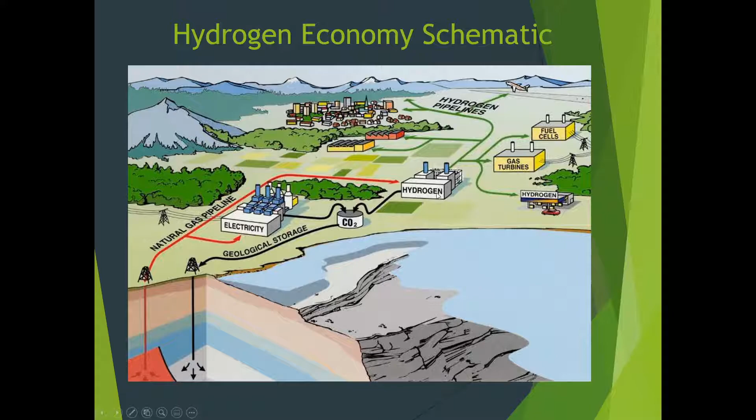Okay. Yes, we do have some natural gas pipelines and stuff like that, and they could be converted over, but we still need to have the central plant and then hook the central plant up to the grid there. All right, Hong Kong is actually doing this a lot. I don't know if they're going to continue doing this because they're having some troubles in that community. But I know that China really wants to do some renewable energy stuff, so I don't think they're going to take this away. But the infrastructure is defined, developed, and delivered.

So they have a lot of hydrogen backup power electrical generator systems for a lot of the skyscrapers in there. They're using it for home fueling. They have this little box right here. You can actually plug in your water tap and make that hydrogen, and go in there and fill up your home. They have hydrogen residential storage units for some people in there. Hydrogen tanks on some of their buses. Community fueling infrastructures being built around Hong Kong.

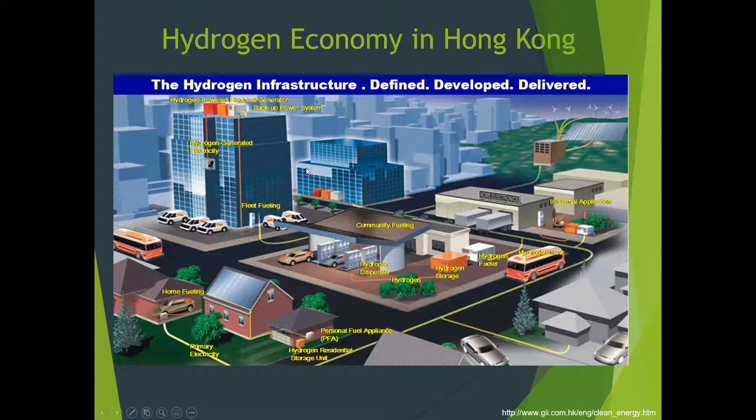So if you want to see a nice case study and see how a city or even a nation, I guess Hong Kong is almost a nation, but still a city, is transferring over to a hydrogen economy, Hong Kong is definitely one of the first ones on the cutting edge of this. Also, like I said, China. I just put this picture up here of these new buses that run on hydrogen.

And also, we need all these hydrogen fueling stations to be put around. And this is what one would typically look like. It's just a big tank of hydrogen. And you just pull up and do the same thing with your gas tanks. Instead of having that liquid fuel go in there, you'll put the hydrogen in there.

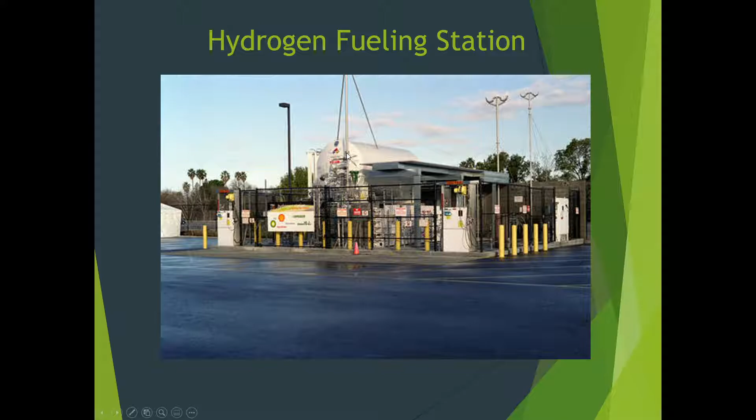And this is actually a little bit safer than liquid gasoline, believe it or not, because that liquid gasoline is a toxin and it gets on the ground and can seep into aquifers and all this other stuff when it's stored underneath. It can leak and cause some environmental damage. But hydrogen is a gas. So if it does leak, it's going to go straight up in the air and find some oxygen molecules and make some water. It's not really going to harm you and explode. A lot of people get scared of explosion with hydrogen, but it's not really that possible, because it's so diffused.

So the hydrogen production cycle. There's a couple of different ways we can make hydrogen. So we can use biological, we can use solar, wind, nuclear, fossil fuels.

All right. To get that H2 or that hydrogen, sometimes we take it out of the fossil fuels, and sometimes we do what's called electrolysis, which we'll talk about in a little bit, and we get that hydrogen and make it into that gas or hydride. All right, so we're just the H2. We can store that, and then later on convert it to what we need.

All right, we can use it for the fuel cells in our cars. Okay, put that gas directly in our cars to run our fuel cells. Consumer electronics, we can make different plastics and things like that out of it, and also we can create electricity. So we can keep the lights going on, or heat, and burn it for heat generation. Okay.

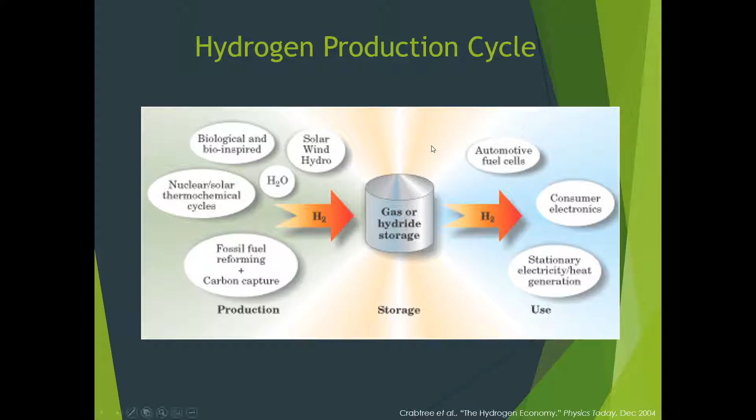So hydrogen production into the hydrogen economy. All right, so the hydrogen economy is going to change a lot of these different things. All of our packaging, our distribution, our storage, and our transfer really needs to be switched over from how we do this with fossil fuels, with coal and natural gas and oil, right?

Because the distribution, although we'll have some pipelines and stuff like that, we're going to have to package it. We're going to have to compress it or liquefy it or put it in what's called a hydride. That's more of a solid state form, all right? And this is really hard to do. But the two best are compression and liquefaction. That way we can take it down the pipelines, the roads, the rails, or the ships.

All right, and these pipelines, you just can't convert from natural gas to hydrogen because the pipelines have to have different specifications to keep the stuff in there. All right, and then the storage is also going to have to be pressurized or cryogenic, freeze it down into a liquid form. All right, and we have to change it from that gas, collect it, compress it, and send it on out.

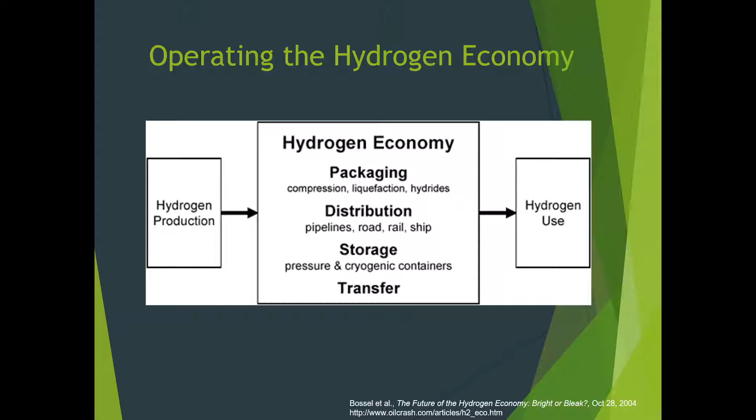So you can see that changing over to the hydrogen economy, there's a lot of engineering problems that we have to overcome, but we can do it. I know we can build that kind of new grid, I guess I should say. All right, and then after it's all done, we can switch it back into hydrogen, and we can burn it, or we can run it through a fuel cell to give us some electricity, whichever one we want to do.

So instead of going to Wall Street, where there's futures markets for oil and natural gas, no futures markets for coal, I envision someday that we'll have to have a futures market for H2, for hydrogen, so that they can sell those futures so these manufacturers and retailers can plan their pricing for this stuff.

And that's one of the things the people in this podcast talked about, how they want the cars all driven on hydrogen, the electricity fuel cell cars. But we really don't have the infrastructure set up. And it's going to take a long, long time. And to get that done by 2035 will be almost impossible. All right, it's kind of pie in the sky. And some of this technology still is not actually done and proven to be viable.

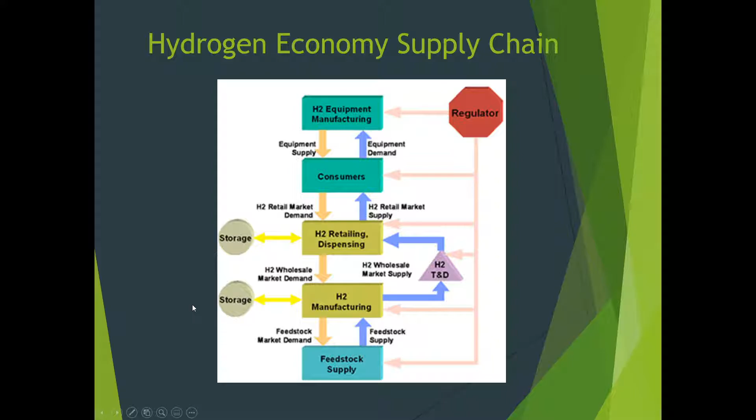Okay, but there's a lot of advantages to a hydrogen economy. Okay, first, the waste product of burning H2 is water. So we set that H2, that hydrogen, out into the atmosphere, it collects with an oxygen molecule, and becomes water. And that's it. That's our waste stream from H2. All right. So that eliminates fossil fuel pollution. Okay. If we're using the H2 to convert that into energy, we have no fossil fuel pollution. We also have no greenhouse gases.

It gets rid of our economic dependence on other foreign nations for our fuels. Like I said, we only have about 2% of the world's oil, so we're always going to need oil from either Canada, and Canada is a foreign nation. So we don't really have that much. We might have enough coal to last forever, but definitely not enough natural gas, right?

And distributed production, all right? So we can also produce this all over. Remember, I've said a couple times during this class that the ecological economists like to say the macro is only as good as the micro. We could actually have a lot of different micro production facilities because it's just taking water and running some electricity through that, and we get the H2 on one side and the oxygen on the other side.

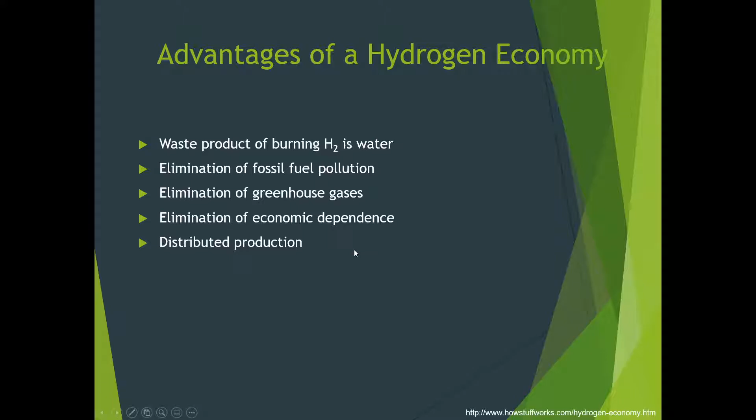It depends on how we make that electricity, of course, but we can have all these little production facilities and have them all tied in together. And if one goes down, the other one can maybe step up, and we won't miss it because of all those different nodes backing each system up. Okay, but there are some issues.

So hydrogen really is not widely available on planet Earth. It's always locked up in something, in our water or in our hydrates in the ocean. Usually chemically combined in water and fossil fuels, they can be separated. Like I said, a majority of our hydrogen comes from fossil fuels, from separating that hydrogen from the fossil fuels, and we never really used it. What we would do is get rid of it because we get a bigger bang for our buck when we burn it.

But we can definitely separate it. This becomes costly though, and we need to be careful. Fossil fuel sources contribute to the pollution. So if we're trying to electrolyze this water to get the hydrogen out using a fossil fuel source, there is no carbon plus. We're just not fighting climate change. We might as well have just burned the fossil fuels, got electricity straight from it and used it in our houses. So there really is no advantage to getting hydrogen from water using fossil fuels.

Electrolysis costs a large amount of energy. To get this electrolysis going, which we'll talk about in a little bit, to separate that hydrogen from that oxygen molecule costs a lot of money. It's a lot of energy to be put into that. And we've got to make sure that the energy that we put into that is actually clean, I should say.

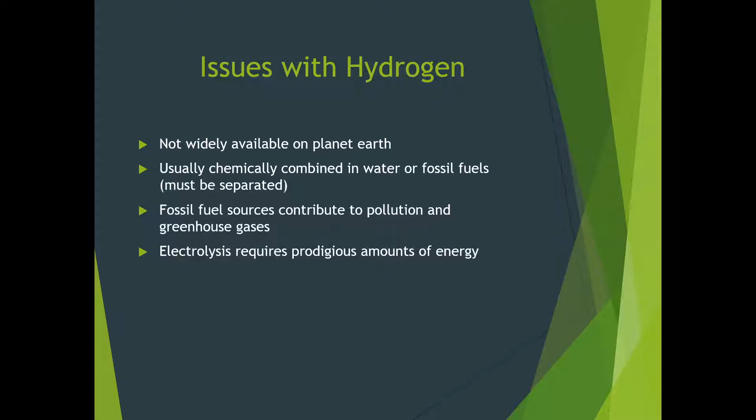And there are some technological questions. Where does the hydrogen come from when we get it? How is it transported? How is it distributed? And how is it going to be stored? All these have to be answered for the hydrogen economy to take place. And we're starting to form some of those ideas right now. We can see that happening in Hong Kong, as a matter of fact.

So how is hydrogen produced? Most of our hydrogen is produced from reforming fossil fuels. We heat the hydrocarbons with steam, and that produces H2 and CO. We could take that H2 and sell it on the open market nowadays. We also do electrolysis of water, where we use electricity to split the water into hydrogen and oxygen, O2 and H2.

And we also have what's called high temperature electrolysis. That's what they talk about a lot in that one paper for the Solutions Project. This is still experimental, and if it really pans out, it will be a good bang for our buck. But we still don't have this en masse.

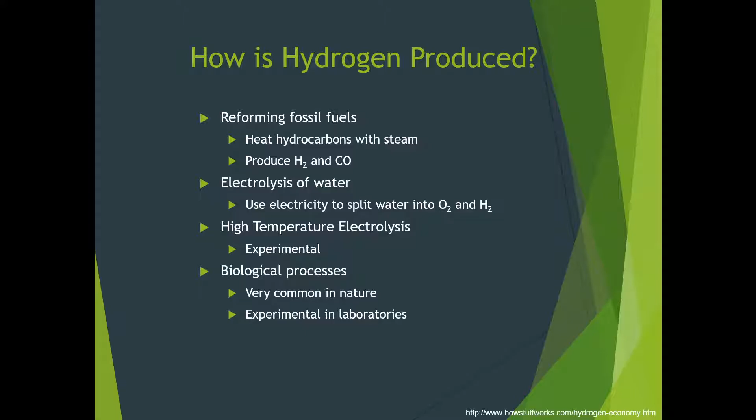And we also have something called the biological process. Believe it or not, Mother Nature has been splitting the hydrogen and oxygen molecule for a long, long time. So we are experimenting with this in labs to see if we can actually build this up and make it a bigger scale. All right, so let's go over these a little bit more.

First, let's do the breakdown. All right, so 48% of all of our hydrogen that we use currently comes from natural gas. So we clean it up and get rid of that hydrogen because we want a bigger bang for our buck, and also for the oil too. We get rid of that in our oil, so we can separate these already from all of our fossil fuels. So the majority of our hydrogen that we get is fossil fuel made, and only 4% is electrolysis. And we need to have this all 100% because we don't want to be using all these fossil fuels.

Okay, so that's what we're trying to ramp up in the world of hydrogen today, is trying to use water, running electricity through water to get it. Okay, and you can see the global production is about 50 million tons per year. It's growing about 10% per year. The U.S. production of hydrogen is about 11 million tons per year. So it's still, all things considered, a small marketplace, and it really needs to grow if it's going to catch on here.

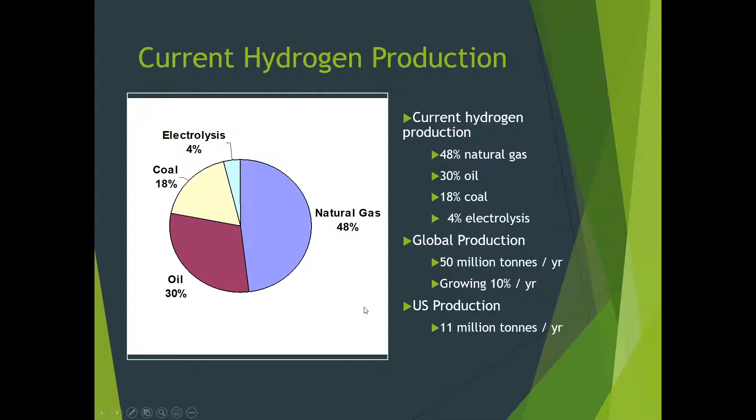But the main way we get it, or want to get it in the future, is through a process of electrolysis. All right, and that's just basically putting electricity through water. You can do this little test at your own home. You can set up a little 6-volt battery, and set in a cathode and an anode up there, and connect the electricity, and that will send hydrogen up one test tube and oxygen up another test tube for you. Okay, and it really is a simple process.

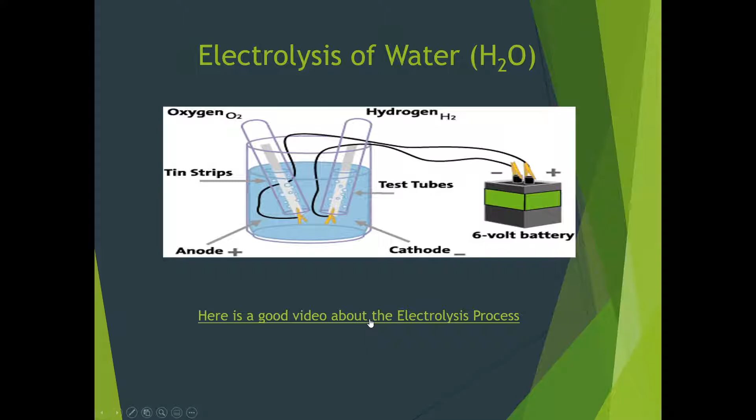But let's watch this video here. This is a good video of the electrolysis process and what we're trying to do with it. I already have it fired up.

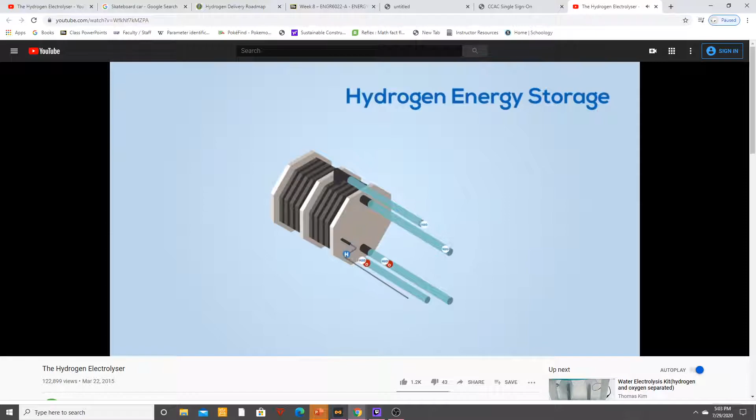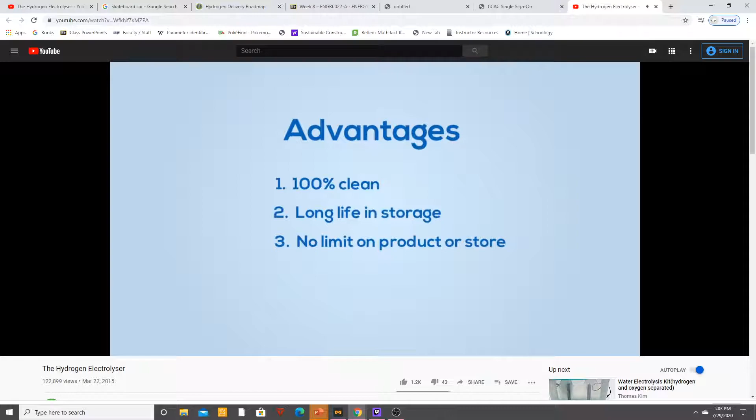Photovoltaic panels are an ever-advancing technology used throughout the world, which creates electricity from the sun. However, storing the electricity for later use is the biggest challenge. And that's what we want to try to do. Instead of using batteries, which are expensive, difficult to dispose of in a safe manner, and have to be replaced frequently. But now there are other viable technologies and systems for storing energy, even for the average homeowner. The system we want to introduce to you is hydrogen energy storage. Hydrogen energy storage has several important advantages over battery systems. The underlying technology that makes this possible is hydrogen electrolysis.

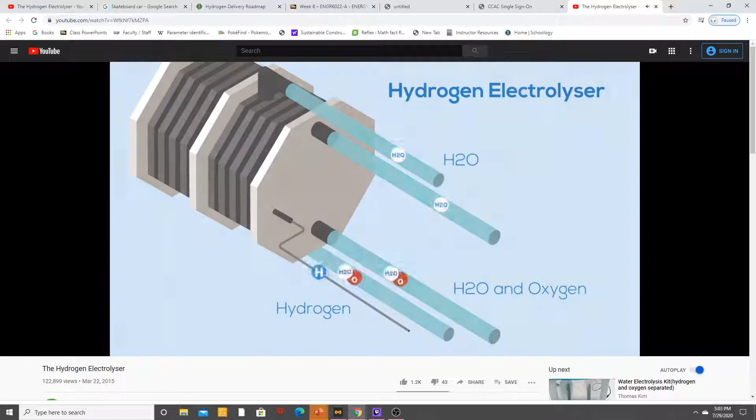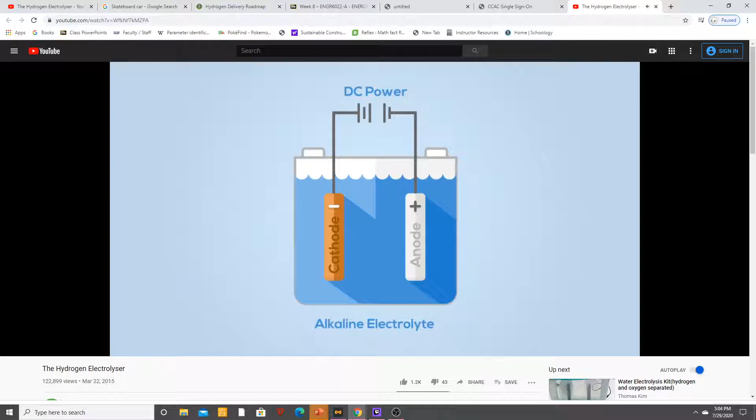You may remember your high school chemistry teacher using low voltages to create reactions in various solutions. This is the electrolytic process and can be used to split water into hydrogen and oxygen. The machine that does this is a hydrogen electrolyzer. We use hydrogen electrolysis to convert electrical energy and store it into tanks in the form of hydrogen, which can be transformed later back into electricity. Hydrogen electrolysis from water is usually undertaken with liquid alkaline or polymer electrolyte membrane electrolyzers. The alkaline electrolyzer works by immersing 2 electrodes in a liquid electrolyte. When a voltage is applied, the product gases are released, in this case oxygen and hydrogen.

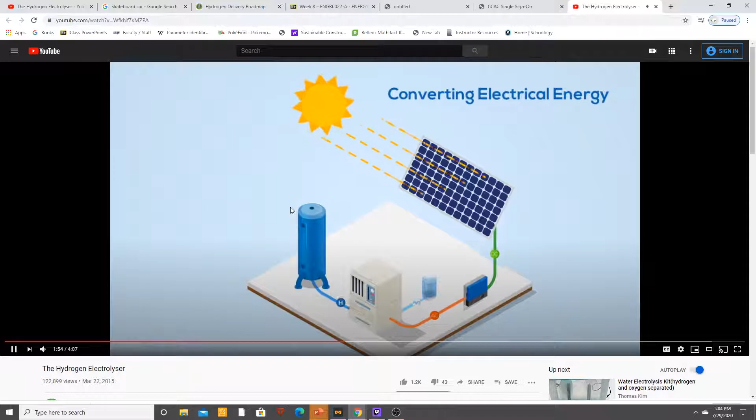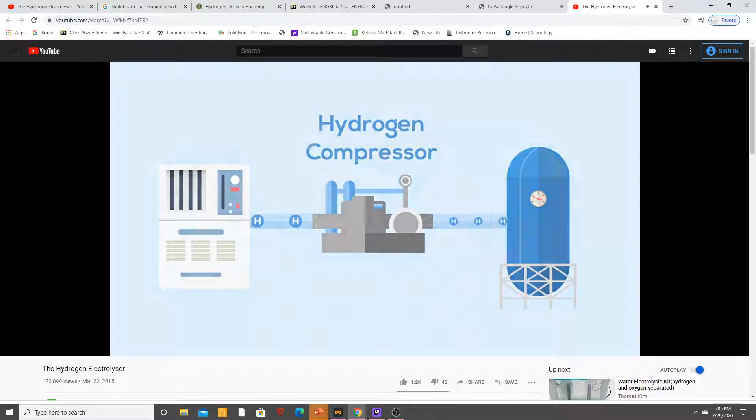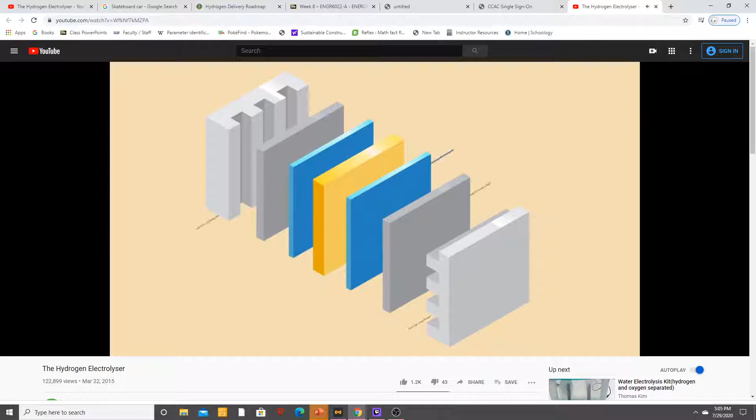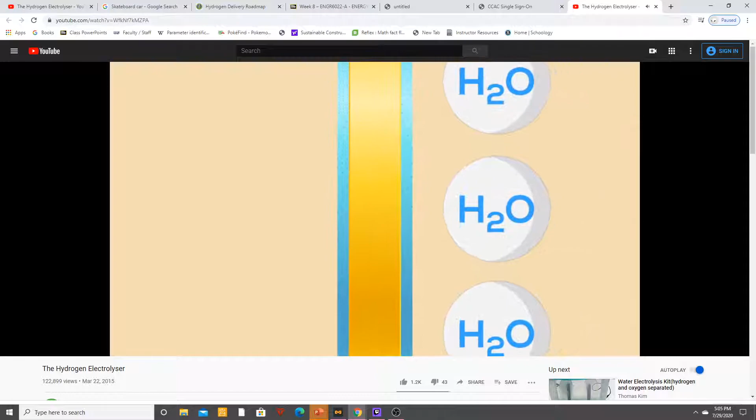However, it does pose some problems. It is unable to make efficient use of intermittent power supplies, meaning it's incompatible with renewables. It also compromises efficiency during storage. To store enough hydrogen for regular use, you would need either a giant tank or an additional compressor. The PEM electrolyzer overcomes some of these issues by using a solid polymer electrolyte, which is the membrane responsible for the conduction of protons, the separation of hydrogen and oxygen, and the electrical insulation of the electrodes. It's able to make use of the fluctuating power supply from renewables and results in pure hydrogen due to the solid structure of the electrolyte. It is easy and more efficient.

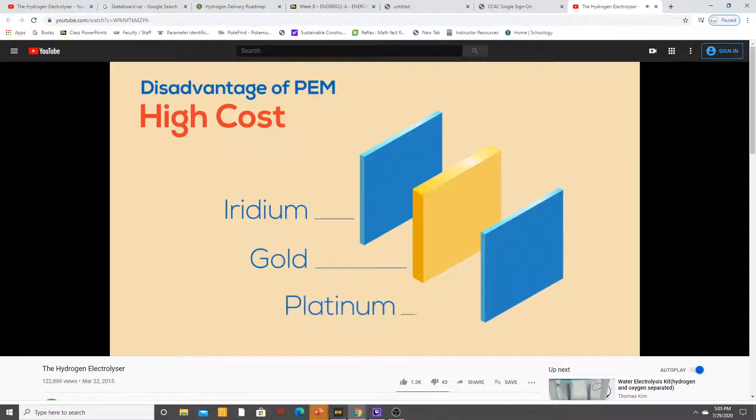However, it has a prohibitively high cost due to its required use of gold, iridium and platinum. Iridium is the most expensive metal out there. Fortunately, a new type of electrolyzer, the anion exchange membrane or AEM electrolyzer, provides a solution to all of these problems. It uses an alkaline solid polymeric membrane, eliminating the need for rare and expensive noble metal catalysts.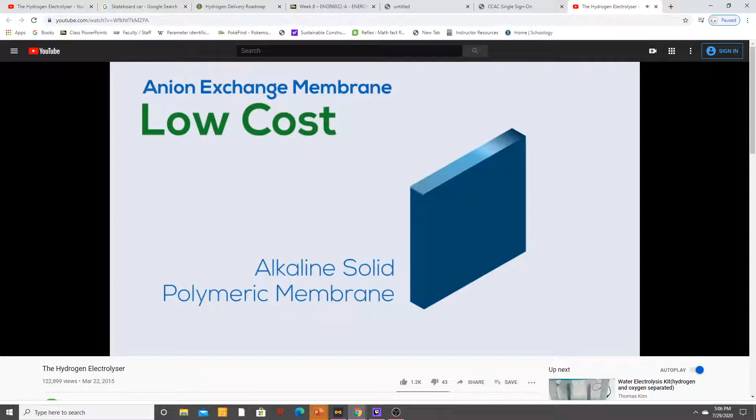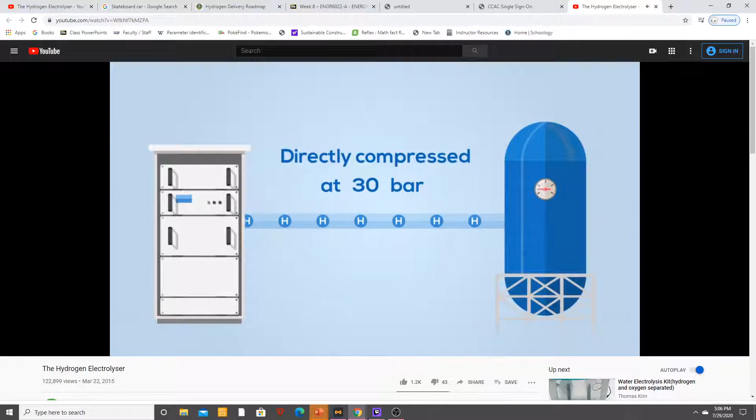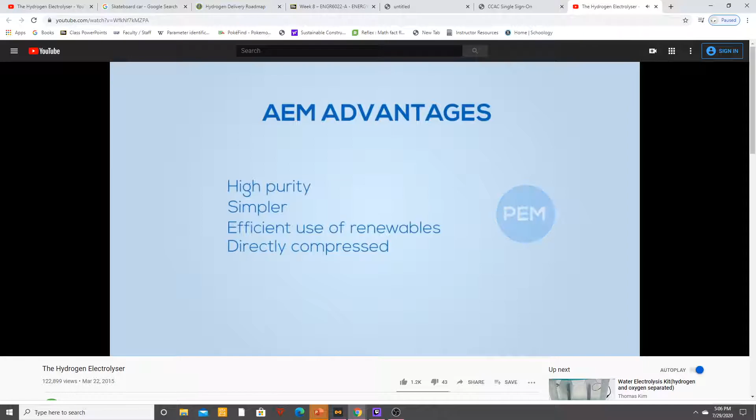The AEM electrolyzer is a simpler and more efficient system that produces directly compressed hydrogen. It's the key technology that enables lower overall costs. The AEM electrolyzer combines the benefits of the PEM electrolyzer with the cost of an alkaline system. It's an important breakthrough which will enable the economical adoption of hydrogen energy storage systems all over the world.

Please contact us for more information on this groundbreaking technology and how it can benefit you.

So that's a little overview of the electrolysis process that is going on in the world today. Let me get that back up. Hold on a second. I don't want the video to keep on going.

Alright, so that's the overview of the electrolysis process. And it is the best way to get our electricity, okay? But we want to try to do this using renewable energies, right? And even the nuclear power plants that we have out there. Because if we just use the fossil fuels, we're not really gaining anything when we're producing this. There's no real offset, right?

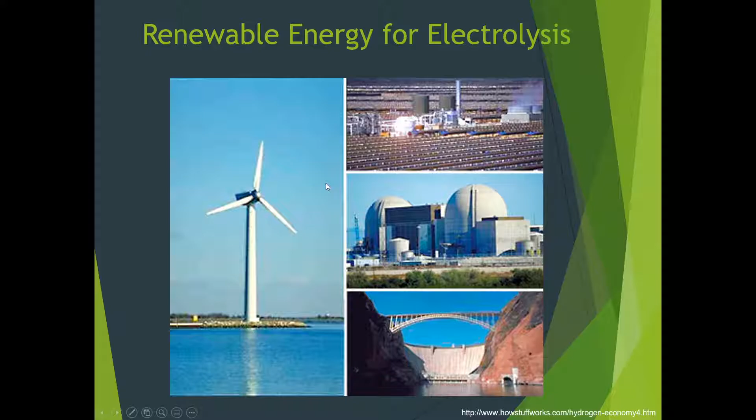And we want to use it for the storage. So instead of using the battery arrays for the storage, we use the hydrogen and compress it and use that. Okay. There's also what's called biological H2 creation. So nature has a very simple method of splitting water. They've been doing it for years. And scientists are now working to mimic these processes in the lab, and then hopefully commercially.

And this is a very, very natural way of getting hydrogen, but very expensive. And to do this on a large scale right now has not really been proven viable. We do have some pretty big biodigesters out there that are trying to do this, and hopefully they'll make an impact, but they really haven't come to fruition at all yet.

All right. Hydrogen also needs to be stored. That's one of the main purposes of it, is that if we can break that hydrogen off that water molecule and store it, we'll be set, right? But it has some major difficulties. H2 has low energy density per volume, so we require a large tank if we were just going to store it alone, in its natural gaseous form.

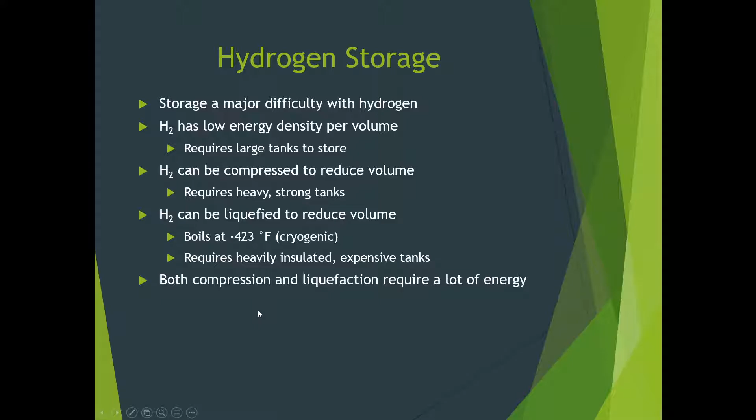Ammonia storage too. H2 can be stored as ammonia, NH3. So we can change it over and then have to switch it back over to get that hydrogen afterwards, right? Exceptionally high hydrogen density. Okay, and when we do this, ammonia is a very common chemical. A large infrastructure already exists for this. It's easily reformed to produce hydrogen with no harmful waste. So once we add this into the ammonia state, it's easy to get that hydrogen back out.

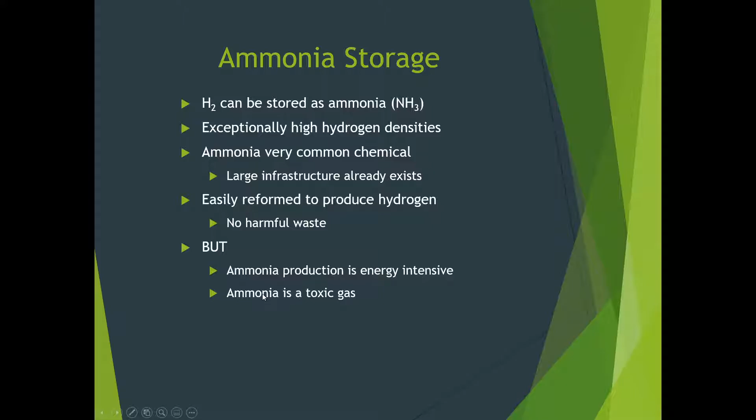All right, but ammonia production is energy intensive. So it's going to take a lot of energy to make the ammonia. Ammonia, of course, is a toxic gas as well. So we're taking it from a non-toxic hydrogen state into a very highly toxic state of ammonia. All right, but switching that back out is not hard at all, and it is actually better than compressing or liquefying the hydrogen.

Okay, and there's also what's called metal hydride storage. So metal hydrides can carry hydrogen. So we can use boron, lithium, sodium, and add that molecule back in to create these boron, lithium, and sodium hydrides. And it's good energy density, but worse than gasoline. The volumes are much larger than gasoline, 3 times more volume, and 4 times heavier than gasoline.

So if we switch this over to these metal hydrides, we will be dealing with an even bigger mass. All right, so we have to have bigger tanks, bigger storage tanks, bigger pipelines, and bigger everything if we're going to make it into these metal hydride storage units. And hydrides can react very violently with water.

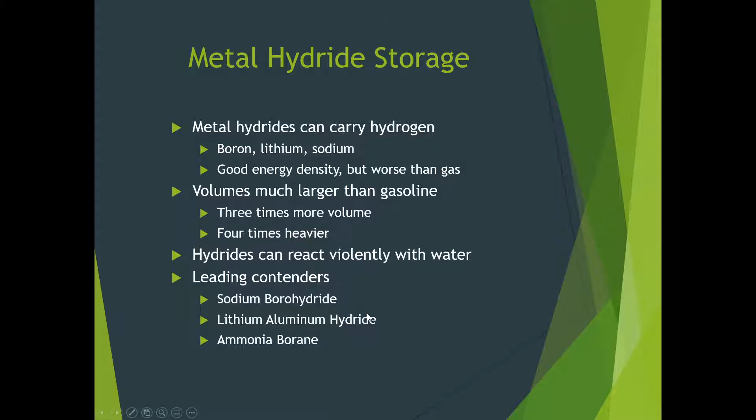The leading contenders right now that we're trying to work with, and this is one of the reasons why those guys don't like the solutions project's answer, and I don't like it either because I think we just go to algae. But the leading contenders are sodium and lithium and ammonia, boron. But it's very expensive to do this, and the technology still really isn't there to make it happen. But scientists are still working on it, and I say keep on going for it. I have no problems with them still going for it.

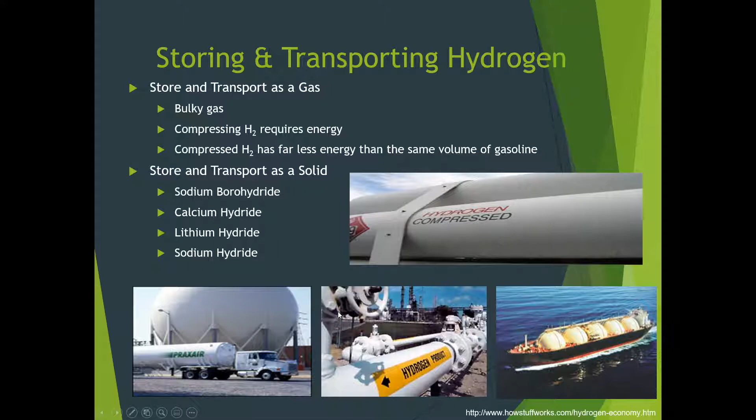All right, so to store and transport the gas, it's going to be really bulky. And compressing H2 requires a lot of energy. But compressed H2 has far less energy than the same volume of gasoline. So there's always that trade-off that we have to look for. And as a solid, the sodium, calcium, and lithium hydrides really haven't been brought to fruition, but you can see it's going to need big, huge tanks to do that. Just like we do with natural gas, we have to do that break-even point and see the total throughput and how much energy we're really getting from this.

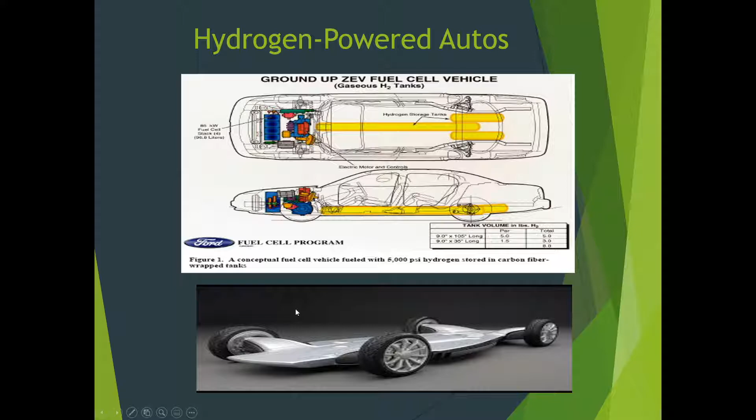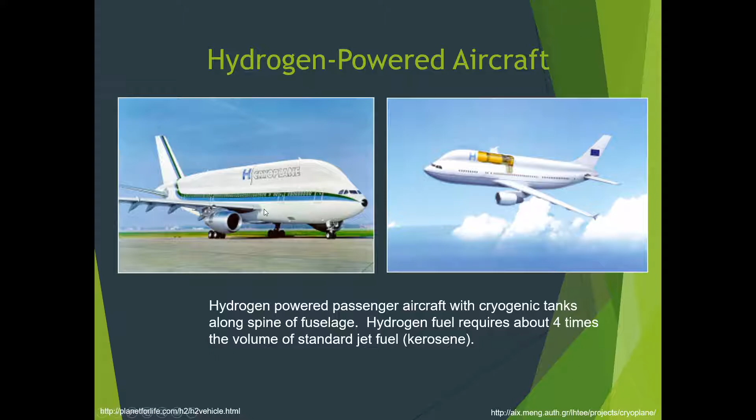And they were right. Solution Project says it can be done. It can be done, it's just going to be too expensive. Well, these work, that's for sure. They work. It's just going to be way too expensive.

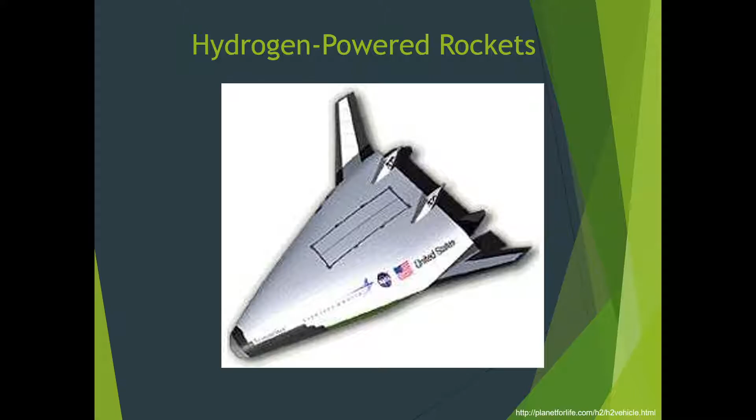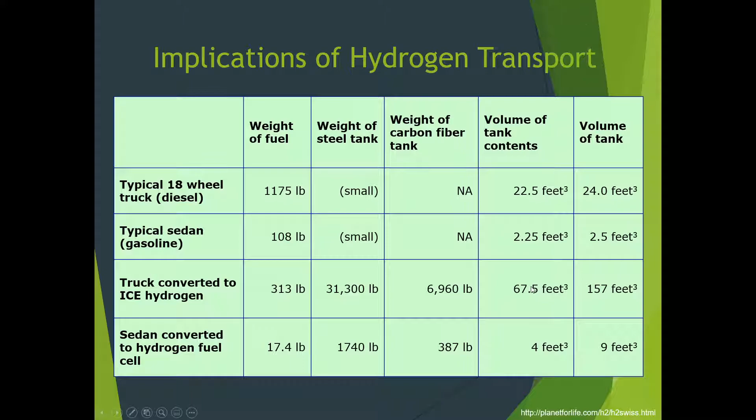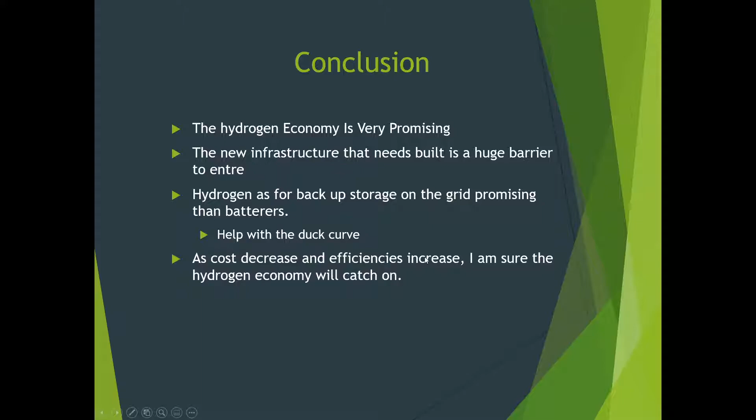So in conclusion, the hydrogen economy is very promising in my book. But a new infrastructure that needs to be built is a huge barrier of entry. That is one of the hardest things for us. Hydrogen for backup storage on the grid is more promising than batteries, so that's definitely a better way to go. I think it will help with the duck curve a lot. And as the cost decreases and the efficiencies increase, I'm sure that someday the hydrogen economy will definitely catch on. I am hoping that will happen in the near future. So that is it with hydrogen economy.

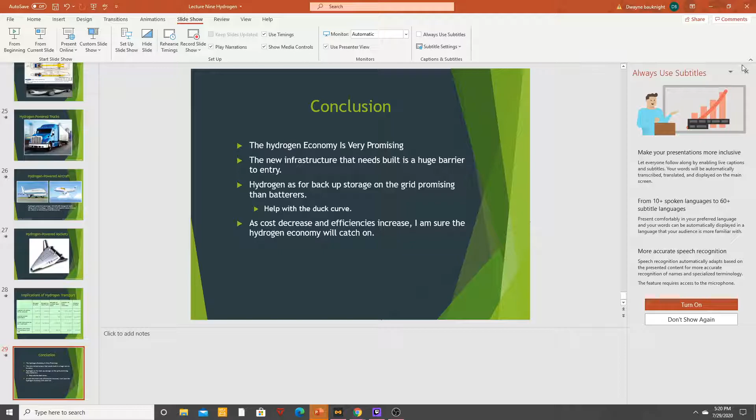Remember, your papers are due on Sunday, and so is your presentation. And next week we'll have a final, and you've got to watch everybody else's presentation and send in a little grade on that one. So if you have any questions about your paper or presentation, please just send me an email, and I will try to answer it to the best of my ability.